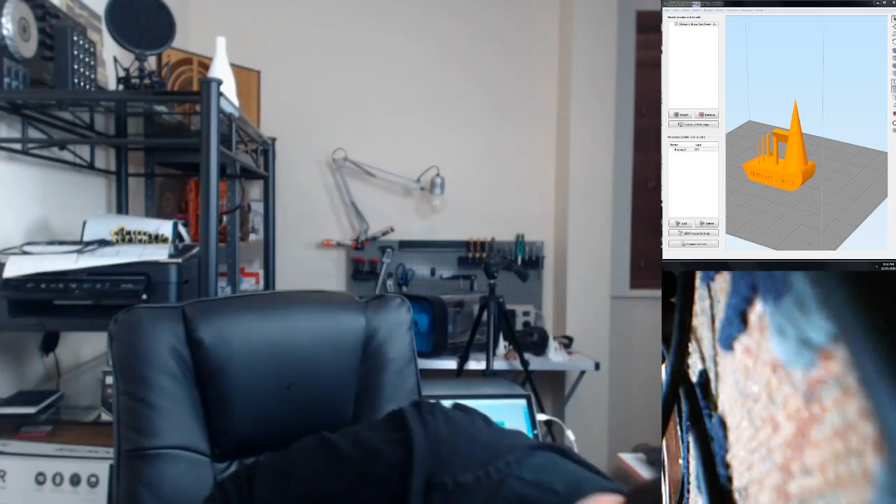Awesome to see you, Richard. To catch a live stream, this is the point of doing it so late. Oh, I lost my other camera again, I keep catching the cord for it.

I wanted to do a late one here in Australia so you could catch it there in UK. So I've got the Trinus printing. It might get too loud with the Cocoon Create on, but we'll see - if it does get too loud, I'll have to print with just one.

Mike is asking, Angus, do you use a 3D mouse when modeling? No, I use this, which is the Logitech G502, which has the highest optical DPI of any mouse. It's an amazing mouse for gaming, and it is an awesome mouse for 3D modeling as well. Although I have tried a 3D mouse, it takes a while to get used to, but I have seen people do good things with them.

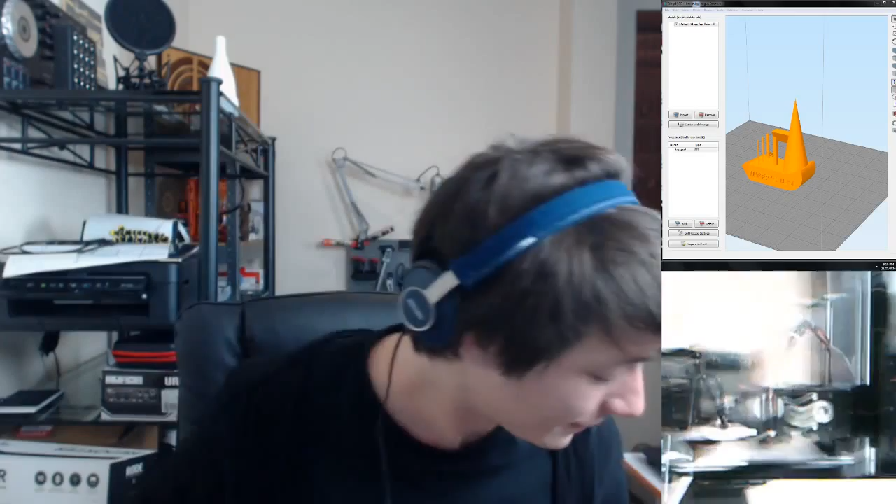So, thinking what filament to print on the Cocoon. I'll probably go with one of the PLAs. Let's see - we could try Polyflex, that might work, it is the Flexion extruder. I'm all open to failures on streams, let's try that.

You have a question? Yes. Okay, what do you think about the Wanhao Duplicator i3 version 2 versus the Malyan M150 i3? That's a good question. So the Malyan M150 is a Hobby King clone of the Wanhao i3. They're both pretty similar, but the Hobby King one's slightly cheaper - it is a clone of a clone, essentially. Yeah, I would just get whichever's cheapest, to be honest, they're both going to be very similar and have the same extruders.

I was going to be getting one of the 150s, I'm not sure if I am still yet. But yeah, whatever you can get, basically - they're going to be very similar printers.

And no, I'm not drinking Red Bull. I am actually having a GT, because it is 9 o'clock at night. I don't drink Red Bulls that late. Only Joel does.

Minion, can you grab me a pair of cutters, please? This one? Yes, thank you. Without pulling the entire tool thing down, thank you.

So I am printing Polyflex. This is Polyflex, very flexible.

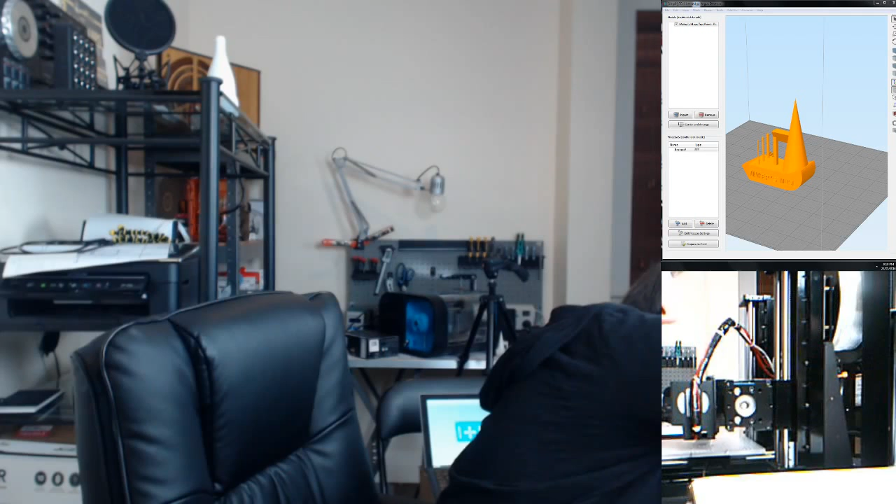So I'm just going to try to feed this in, if it works. Let's see.

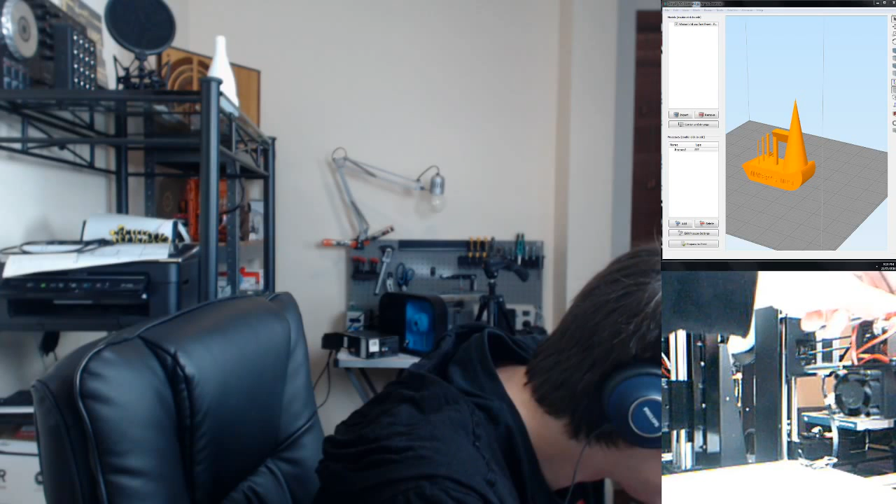You can ask me questions while I'm doing this as well. I can't see the screen.

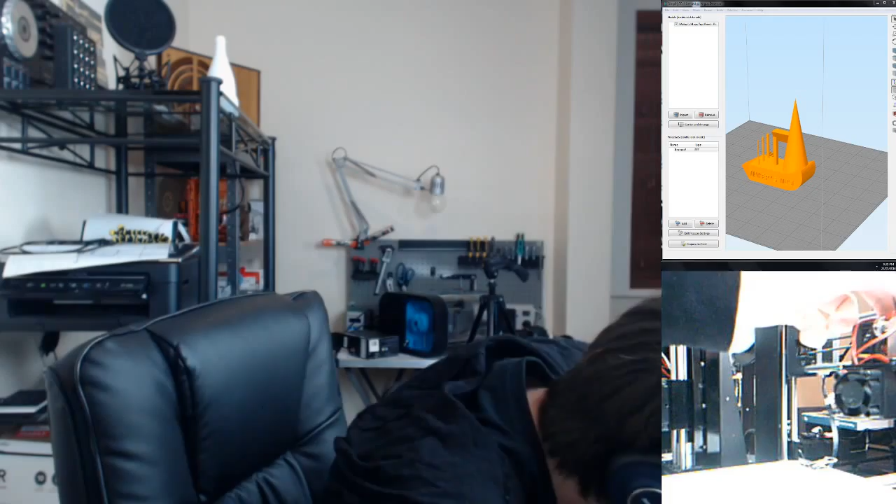Energy Strike would like to know, do you like the Hobby King filament? I haven't actually tried the Hobby King filament myself. I've heard that the colours are not fantastic, but apart from that, yeah, it's cheap. It is really cheap. Hobby King filament is ridiculously cheap. Whether it's good or not, I'm not sure. I haven't tried it yet.

This is the only problem with filament samples - you end up with especially flexible materials. So this will be interesting. I'm going to have to hand feed this.

Right, so let's load up a cube. I'm going to go with Wanhao i3. And I'm going to change it to a 1 multiplier, 0.25. And print speed, I'm going to put that pretty low, just conservatively, so maybe 2000. Yep, it's good.

Question? Yeah, go ahead, you can interrupt me anytime. What do you think about the Anvil 3D on Kickstarter, if you've heard of it? To be honest, I haven't looked too much into it. I've been looking at some other Kickstarters, like that toy 3D printer for kids, and the really cheap 3D printer, but I haven't looked too much at the Anvil. Just double check - Anvil, it's the one I'm thinking of. Yeah, I haven't actually looked into this one at all. To be honest, there's been something like 5 3D printer projects over the last month on Kickstarter, and it's been really hard to catch up. But yeah, it's another low-cost printer. I'll definitely do a video on it before the campaign ends, though.

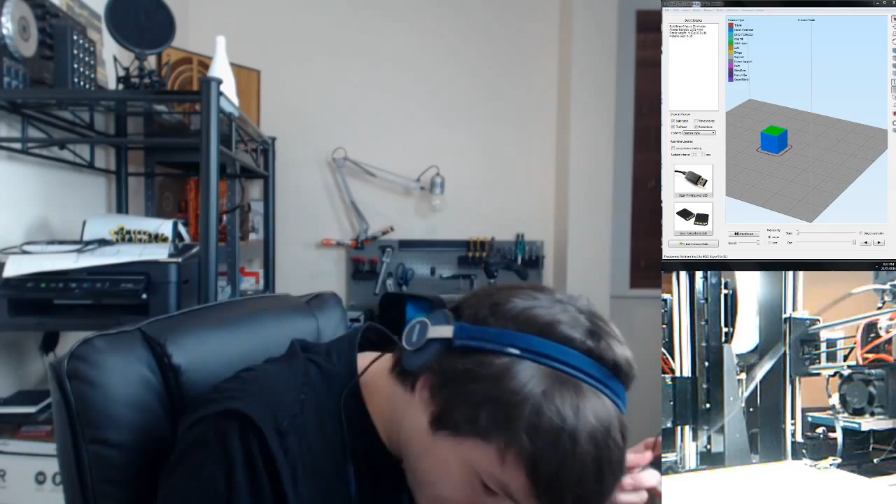How'd you go? I don't think there's a spare one. You can probably unplug... USB in here? Is there a... yeah, unplug the USB.

Energy Strike - any way to get Simplify3D legally if I don't have $150? You could ask them nicely. That's what I did, that's how I got it. But apart from that, not really.

Ben's asking specs of my rig. I've got an older generation Core i7, I can't remember which. It's mini ITX board, 8 gigs of RAM, GTX 760. Most of it's secondhand, and I only recently pieced it together out of bits and pieces. But it's quite good, it does what I need.

Okay, so I'm going to send this to the SD card.

Inkdroid would like to know, if you could print with any 3D printer, which one would it be? If I could print with any 3D printer, it would be one of the humongous Projet systems that 3D Systems sell, like the humongous resin systems, because they just are awesome. I mean, but they cost $500,000. But, you know, you didn't put a price tag on it.

And Evan's asking about the BPS. No, I haven't had any time, Evan, at all to do anything with the BPS extruder yet. I will as soon as I can, but at the moment I need to finish testing the Flexion.

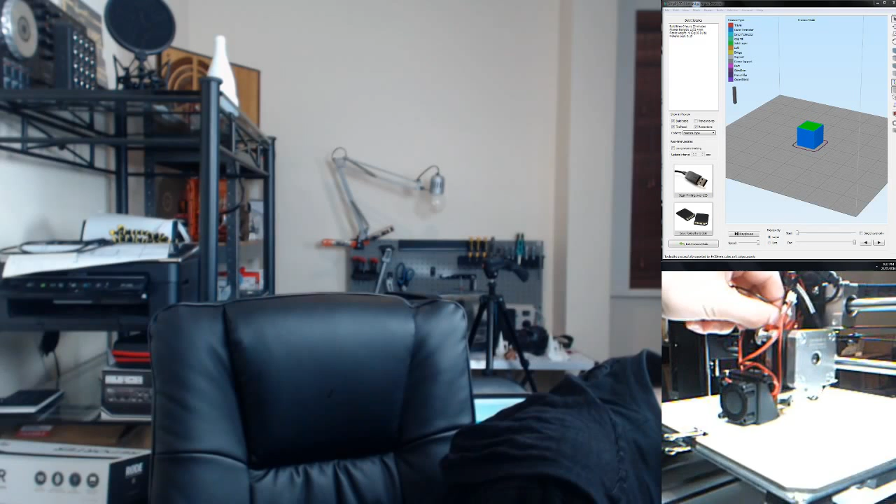Make sure this is actually extruding. Doesn't really look like it's extruding. There it is now, sorry to interrupt.

Carl's asking about the best value filament in Australia. That would be the Hobby King stuff. I like eSun personally, I think eSun is very, very good. But yeah, the Hobby King stuff is also very, very cheap.

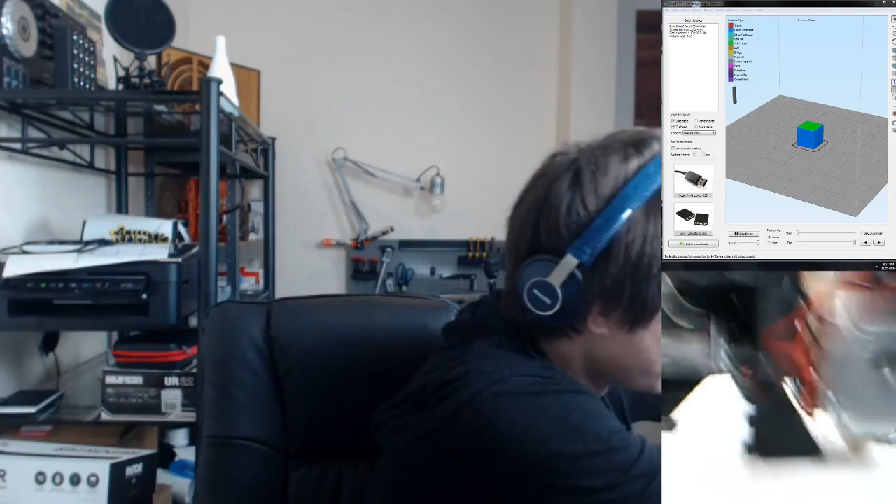Jason is asking about Hatchbox filament. Have I tried Hatchbox? No, because it does not exist in Australia at all, you cannot buy it in Australia. It exists in the States and possibly the UK, but it's a renamed Chinese brand that's been distributed, and I've never seen it here.

Evan's saying about the new PLA Plus, which is a higher temperature PLA, so I might have some of that in my box of tricks. Let's have a look, this place is a complete tip at the moment. I keep tripping over wires and all sorts of horribleness.

That's the carbon fiber, which we won't be printing today because I don't have a hardened nozzle. What's this?

Question: Michael would like to know, any word from Tevo about the Tarantula? Oh, hey Michael, good to see you in here. Yeah, I had a really nice chat with them on Skype. So in terms of me getting a Tevo to test, they are sending me one to test out. And yeah, that's really cool because it'll be the first low-cost kit I've covered on Maker's Muse, and they seem really comfortable and confident with their products.

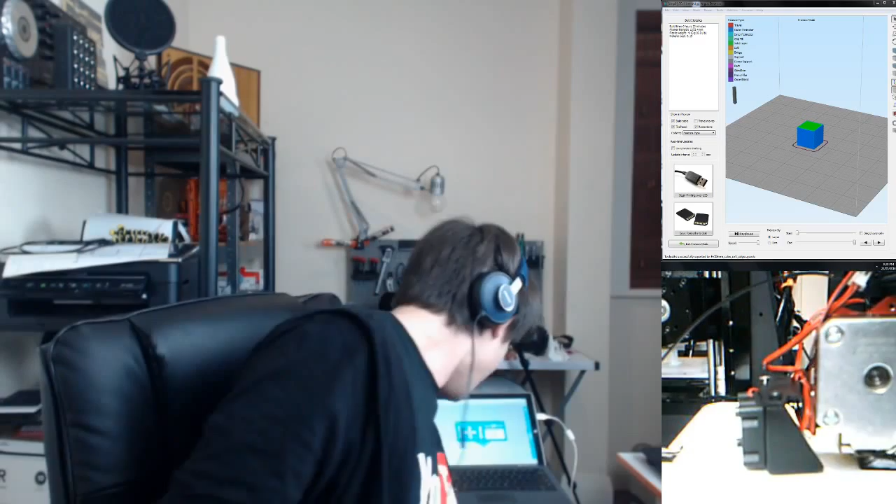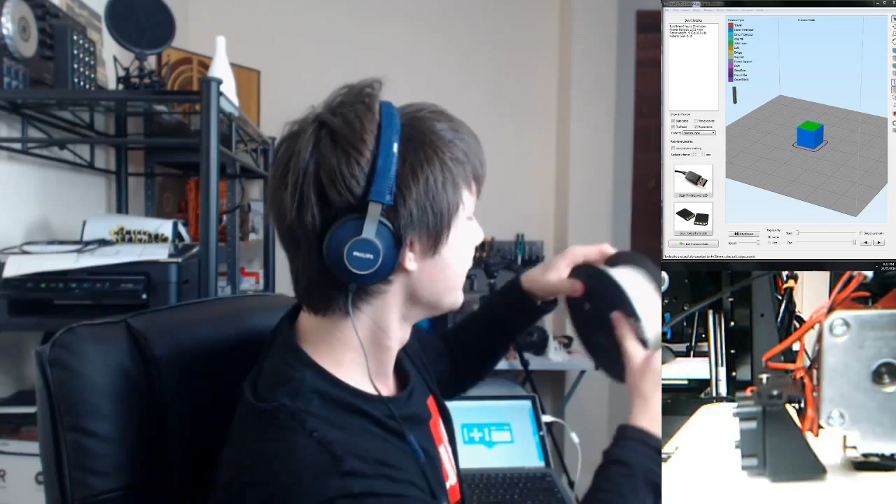And the Trinus is finished. How about that? Let me get that off the bed. I don't know if you can see that in the cam—this is the print off the Trinus. It did have a bit of filament at the bottom, so it's a bit crap there, but this is a pearlescent filament I'm testing at the moment. If you look at the roll, it's sort of a pearlescent effect. It's a really nice PLA filament I'm testing for a friend in China.

Thoughts on the Carbon 3D? Let me just grab another roll of filament. So the Carbon 3D has come to market now.

But there's still a few doubts in my mind about it. They always show it printing lattice structures with a thin cross-sectional area in terms of the print bed as it grows. I would love to see them print something like a brick—I know it's stupid, but I'd love to see them print a brick of resin out of that technology to prove it can print something that large without warping. Personally, I think it can't. I think you'd get dimensional inaccuracies printing something so large, which is why they print lattice structures to prove their technology.

I'm just going to dump these all out, I'll clean them up later, tidy it up later. So we've got some more Polyflex. This is PVA, which I'm not going to print with because that's just useless.

What are your thoughts on 3D printing drones? So, yeah, I mean, why not? People have been 3D printing quadcopter parts for ages, and there's no reason you can't do it. So I definitely think, yeah, go ahead, it's a great way to do it. You can prototype on the fly, test it, and if it breaks, print another one. Nothing wrong with that. They're all the fancy ones.

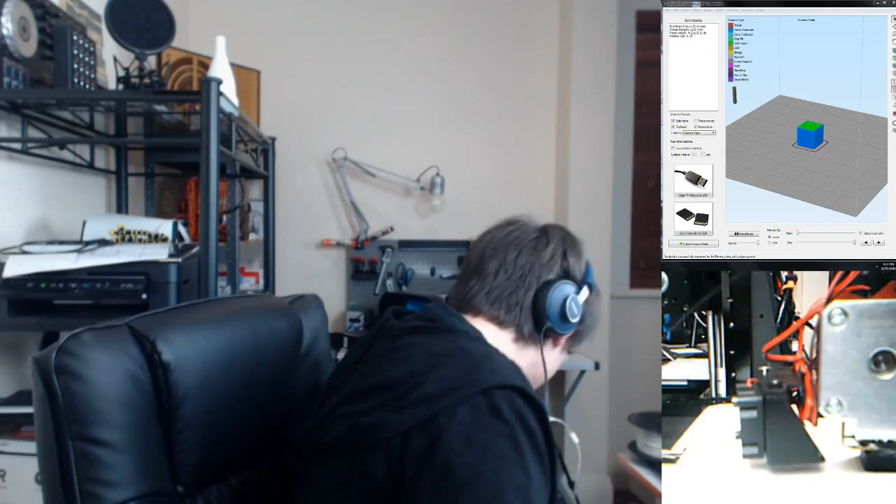And I found the red. It was hidden. There we go. Evan, you're so clued on.

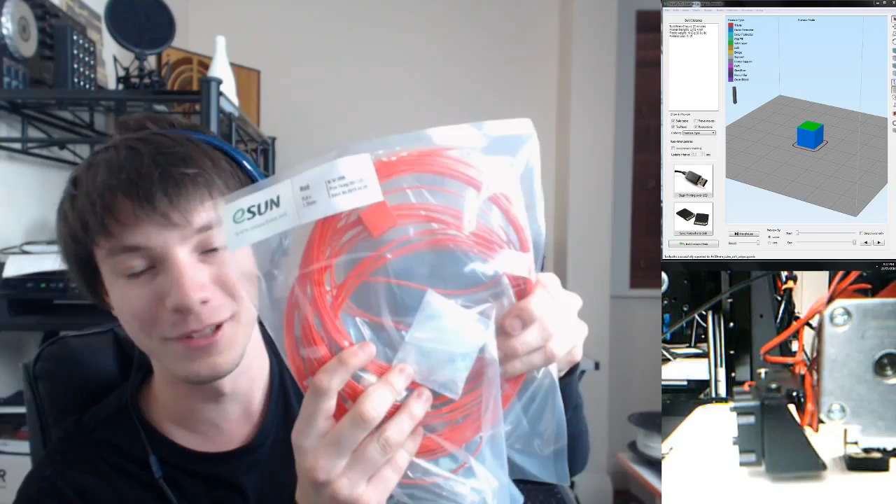Okay, so this is the PLA Plus from eSun, which is a higher strength PLA. Let's try printing that.

A question - should I buy a Wanhao i3 from Amazon for my first 3D printer? Yeah, okay, so the question is, should you buy a Wanhao i3 from Amazon for your first 3D printer? I think the Wanhao i3 is a respectable first 3D printer that you could buy.

It's not the best machine on the market, but it's definitely fairly easy to get up and running, keep running, maintain, calibrate. Just gotta keep this feeding. And it's cheap - really cheap for the bed volume you get.

I've done a review on the original Wanhao, which was okay. I had a few issues. The Cocoon Create is the same as the Wanhao V2, and the version 2.1 fixes the issues I had with the V2. So yeah, it's a machine I would highly recommend for newcomers with a budget for 3D printing.

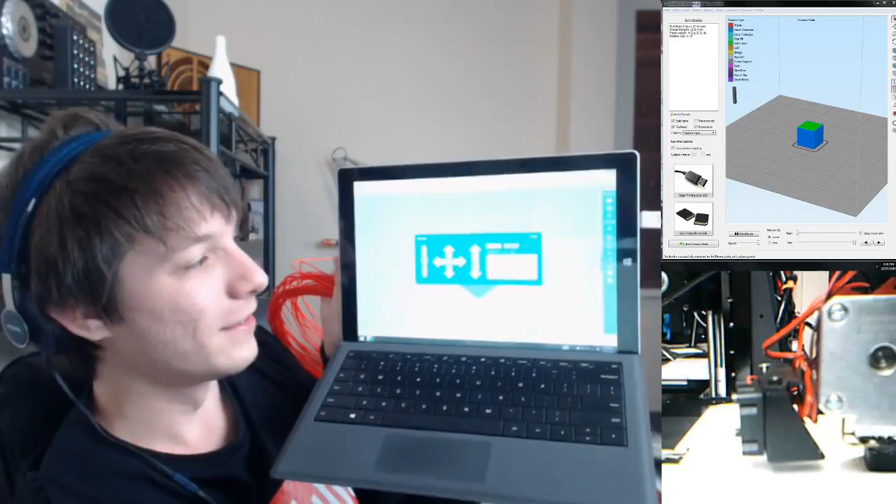Definitely. Right, let's see if I can heat up. I'm using Pango software to run the Trinus. It's not very good, but it works. But it's a Kickstarter project, so it's got a long way to go.

How's your anime print going? Oh okay, while this is warming up, the question was, how's the anime print going?

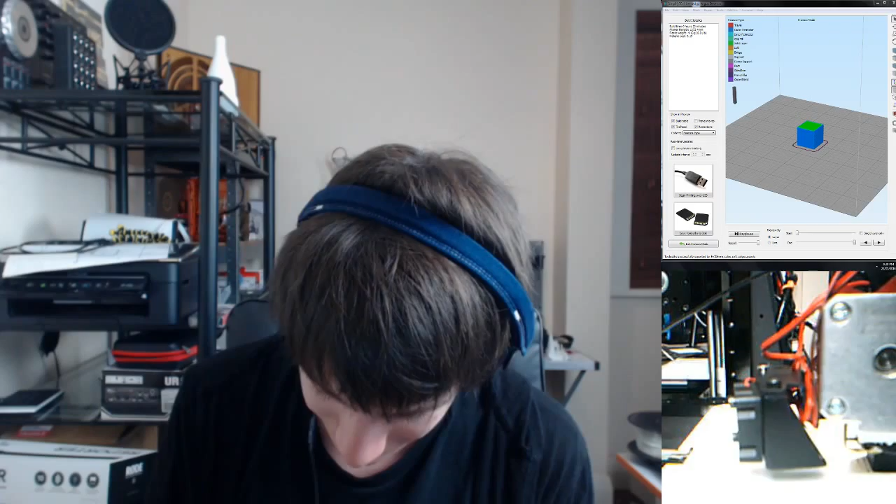So because you guys are in the stream, I will give you a sneak peek. Okay, ready for this? This is how it is so far. There you go.

What I've got - the head that's separated off into one piece with the hair. I've got the arms which clip into the skirt, or top, I don't know. It's too thin, so I need to go back into Meshmixer and thicken it up there because it broke through. That's the bottom of the skirt. And that's the top of the legs.

And this is the classic Miku little arm - I call them arm stockings in my file, I don't know if that's the right word for them. But look at that hand. That hand detail is phenomenal.

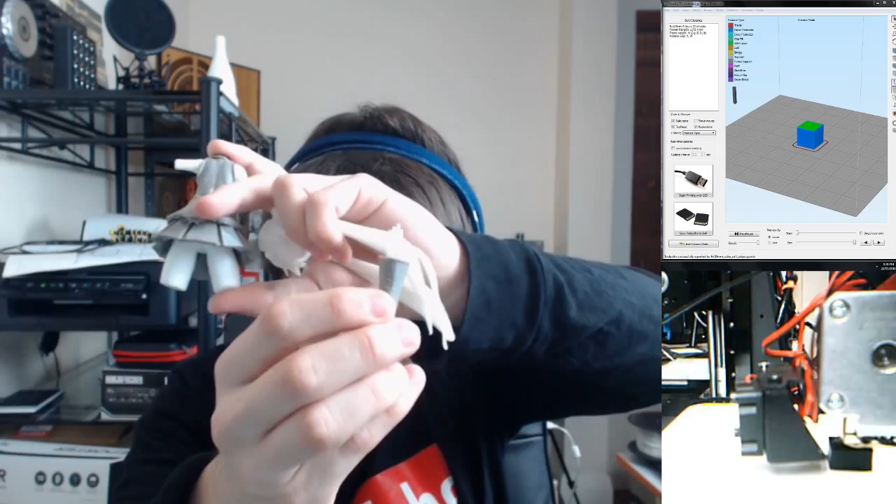If I can... there you go. That hand looks so good. And the legs as well, the feet. So I've been printing this in just white and grey PLA.

The grey PLA is actually something special - it's a formulation I got done for myself to test out, and it's actually working really well. So a little bit more on that later. But yeah, it's coming along.

And then once I'm happy with it, I will use my Miku Blue PLA to create an assembly. And I'm probably going to do it twice the size of that. So big, it's going to be cool, but it's so hard to do. I was going to make a tutorial out of it, but it's so difficult.

In terms of what printer I used, the Upbox at 100 micron layer heights in PLA. And the Upbox is a fantastic printer to do that sort of detail.

Alright, I'm going to change the filament over on the Trinus. So again, that's that pearlescent filament I'm testing out for a buddy. Put that aside. And see if I can find the end of this sample.

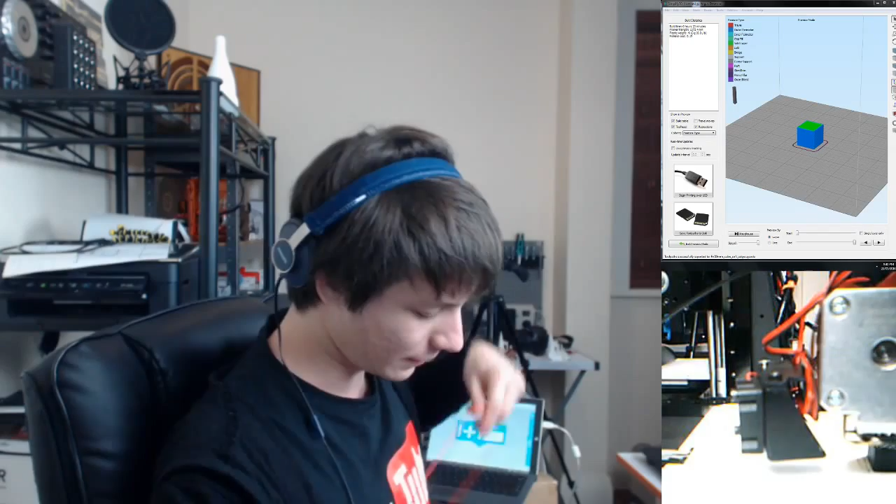Question - what are your thoughts on the Robo 3D R1? That's a good question. So the question is, what are my thoughts on the Robo R1? I have never used one.

I have heard that out of the box they're not very good. And I was going to have one on the way, but it never materialized. So I might follow that up, but to be honest, I've got enough things on my plate that I don't have time to review machines like that at the moment.

But yeah, I know some people with them that really like them, but I definitely know a lot of other people that have issues with them. Out of the box, they're not very good from what I understand.

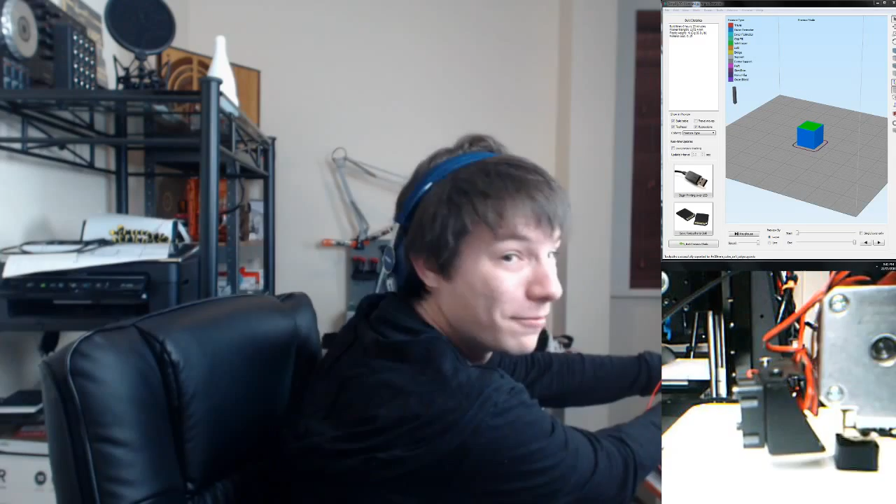Go with a Wanhao. Just get a Wanhao. Everyone has a Wanhao - there's got to be thousands of them around the world now. It's such a popular printer now.

Right, so this is the PLA Plus from eSun. So let's do another print.

There's just crap everywhere, it's absolutely everywhere. Oh dear.

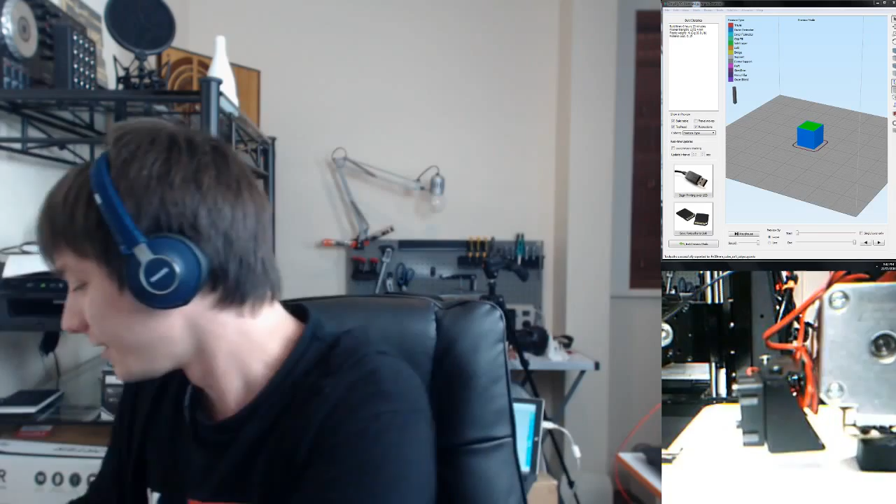So Boomerang Freak, in terms of that pearlescent filament, basically it's a PLA that I'm testing for someone in China. I can't go into any more detail about it yet, but he's going to be releasing it soon, and I'm just helping him quality control test it. I am super impressed with it so far. Where is it? This is a print I did with the orange variant of it.

Actually, this is a really... I'm going to talk about this in a video soon. This is a really cool print. But yeah, the orange is just nuts. And this is the grey I've been testing, and it's phenomenal PLA. Really, really strong as well. It's a modified PLA, it's not just pure.

I've got a thing from Mike. He said, I bought some nylon, it's a great material, but I cannot get it to laminate. Have you printed with nylon before? Yeah, okay, so the question is about printing with nylon.

Nylon is super difficult to print. If you thought ABS was hard to print with, nylon is something else. To print successfully with nylon, you need a really hot bed. You need a nozzle temperature of about 260 degrees, I'd say, depending on the brand. And you need to make sure the nylon is completely dry, because if it absorbs water, it will start bubbling and it'll ruin your print.

In terms of a build surface for sticking nylon down, I have found, for me, if you get BuildTak and sand it - nylon wants a rough surface to stick into because it's really slippery. It doesn't stick well to smooth surfaces unless you're lucky and get a lot of suction. It wants to dig into little grooves. So I've actually sanded BuildTak before and stuck it down to that. People have sanded Garolite, which is like a fiberglass plate.

That works as well. But in terms of support material and rafts, you can't get any support material off - it just welds, which is why it's so strong. But yeah, try sanded BuildTak. I know it sounds silly, but it's worked for me in the past. But it is hard to print, definitely difficult.

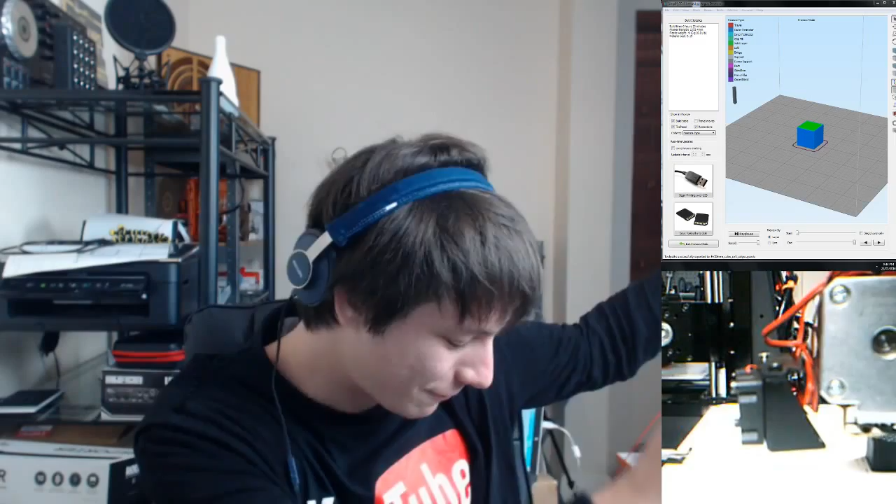One from Ben - he tried craftware during the week, but it keeps slicing with gaps in layers. Do you know what the fix or issues might be? Craftware, craftware, so the question was about craftware having gaps in layers? Yep, gaps in layers, keeps slicing with gaps in the layers. Weird.

I had that issue recently with another file, and I thought the file was corrupt, but maybe it's an issue with the latest craftware - I'll have to look into that a little bit more. Try sticking it into Cura and see if it does the same. If the same file does not have issues in Cura, then it's craftware that's causing the problems. I haven't really used the newest craftware, so I can't help you, unfortunately, for that.

And Mike's saying, done all that, what about speed? So about the nylon, you can print slower, but again, as long as your nozzle is capable of keeping a high temperature of 260 degrees, then it's fine. You will get stringing though - nylon will very much string between things. You just cut them off with a knife.

So Ben's saying there's layers missing. Try Cura to see if your file still has problems, but I did have something, funnily enough, similar yesterday in Craftware with one type of file, and I'm not sure what was causing it, so I'll need to look into that a little bit more. The 3D printer is suggesting to fix your model, make sure it is not damaged, because that will definitely cause problems. So remove one of the issues if you can.

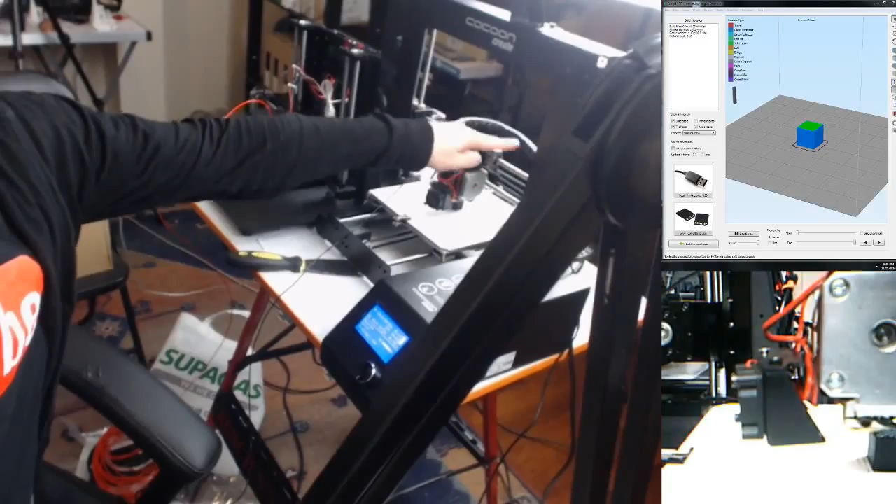I am not the person to ask for that. But if you look at the Cocoon Create, it has a cable guide. That's a fantastic way to manage your cables without fatigue. Or a cheaper way to do it on the Trinus is one of those wire cable organizers you buy from a stationery store. That works pretty well too. You don't want anything where the wire bends 90 degrees because that causes fatigue and breaking over time. But yeah, I'm definitely not the person to ask about it. I just zip tie stuff randomly and hope for the best half the time.

Daniel would like to know where I studied industrial design. I studied that at UTS, University of Technology Sydney.

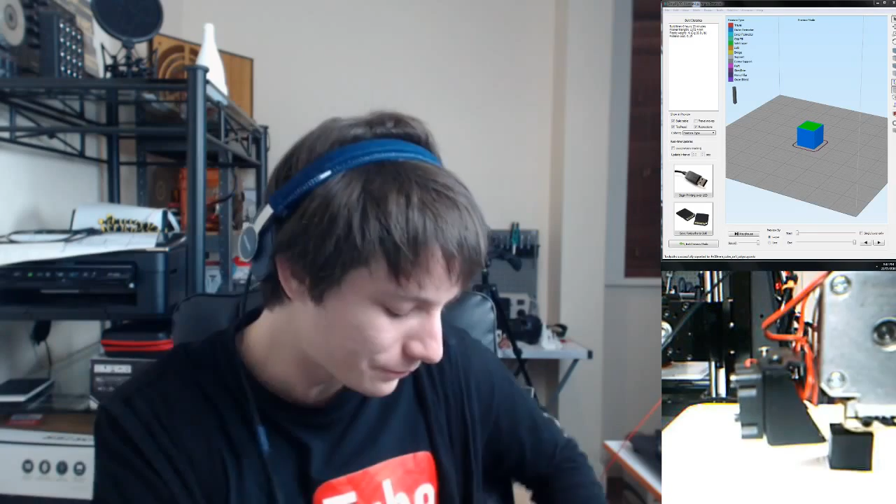Out of high school I wasn't sure what I wanted to do. I was building combat robots at the time and not paying attention to my studies. My parents tried to make me enroll into engineering because they thought that would be great, and I thought robots equals engineering. I did get in, but decided to do a gap year working as an apprentice in electronics. I don't know why, but I learned a lot. Afterwards I decided engineering wasn't for me because I hated maths. I got into my industrial design degree because I could tell them what type of steels I was using in my combat robot, and I could use Rhino for 3D modeling.

That was a four-year degree, very intensive, four years full-time. The final year was all about major projects and presentation, which is why I know a fair bit about machine design, because I designed my own 3D printer at the end of my university degree. That's what I did. Excuse me for a moment because the Polyflex is tangled around my chair.

Oh dear, run over it.

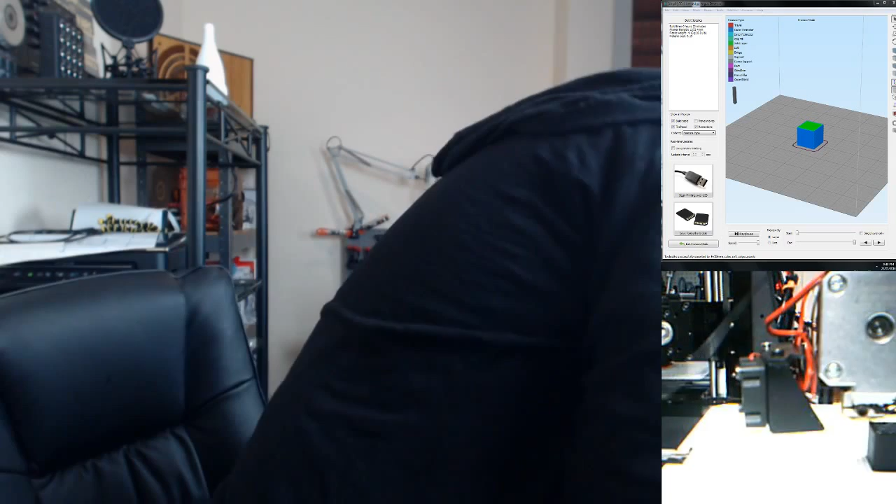While you're untangling - someone asked, what's your favourite wood filament, or the best one? They're all pretty horrible, honestly. The issue with wood filaments is they have wood particles in them, so you risk blocking your nozzle. It doesn't matter what brand it is, it just takes one or two particles that are a little bit larger than the rest to block your nozzle.

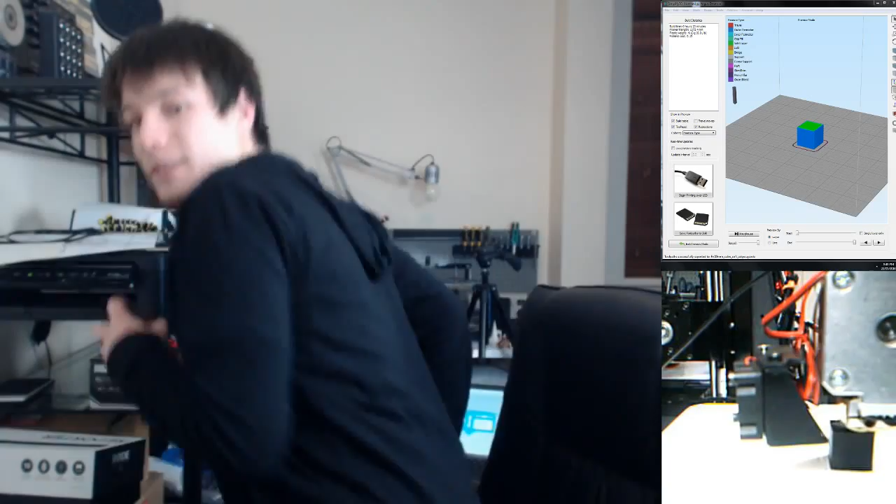And also they're very soft. I've had great success with the Filamentive wood PLA by printing very fast, and I like that it's a darker colour. I'll just show you quickly - I have reviewed it. This is the Filamentive wood PLA, a nice dark wood colour, and it's my favourite at the moment. Prints pretty well, but you have to print quite fast. I tried the original ColorFabb wood fill ages ago and it just clogged every printer I used. I think it's changed now, but it put me off.

Mike would like to know when I'm going to start printing with concrete and ceramics. There's a whole class of paste 3D printers, like ice cream or cake icing - that was my design, I designed a cake icing 3D printer back in university. Then there's concrete and ceramics. They're cool, but not really something I'd do. I don't see them being fully practical yet, they're more of an art project.

There are ceramic printers that use a powder and print binder into the powder, then you put that into a kiln. They're pretty cool, you can do some really accurate things, and I think that's how Shapeways does it. But in terms of me doing it, I think I've got my hands full at the moment with all this other type of 3D printing, let alone other technologies. I am looking to get a resin printer very soon though, and I may make one first - some of you will know about the YOLO project.

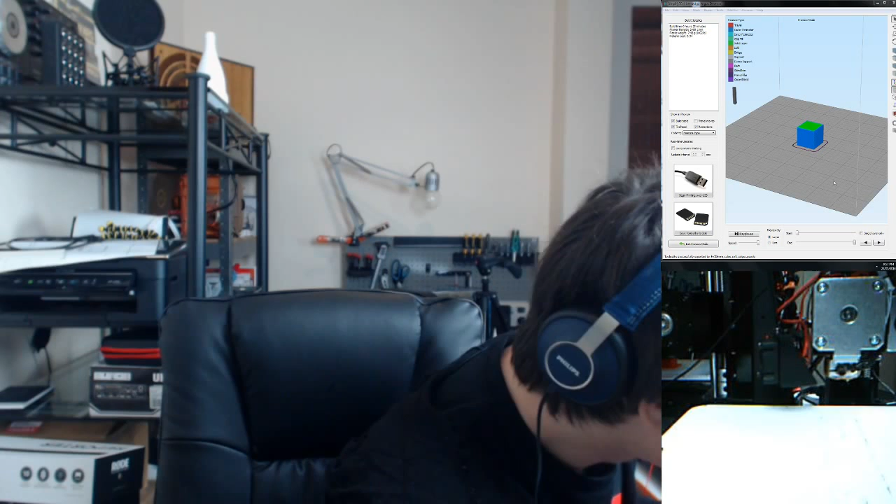Someone asked how do I get my minion to answer questions? She's just choosing one she likes, I can't control these minions. Cool, that's a tangle.

Fran's saying you ordered your Wanhao i3. Good choice. I mean, I wish Wanhao paid me to recommend them, but I've never actually talked to Wanhao personally. It's funny.

This is never going to untangle at all. Let's hope it's enough for one cube.

Is the Original Prusa i3 any good? The Original Prusa? Is it like the genuine Prusa, the new Prusa? Because that looked really, really good. I haven't looked into it too much, to be completely honest. If it's a different brand, I don't know about it. But yeah, if it's the genuine Prusa, you know it's going to be good. I mean, enough said, it's a genuine Prusa. I haven't ever used one just because once you get them to Australia, the price to performance doesn't quite line up. But he's the guy that invented the whole i3 design, so yeah, it's pretty good.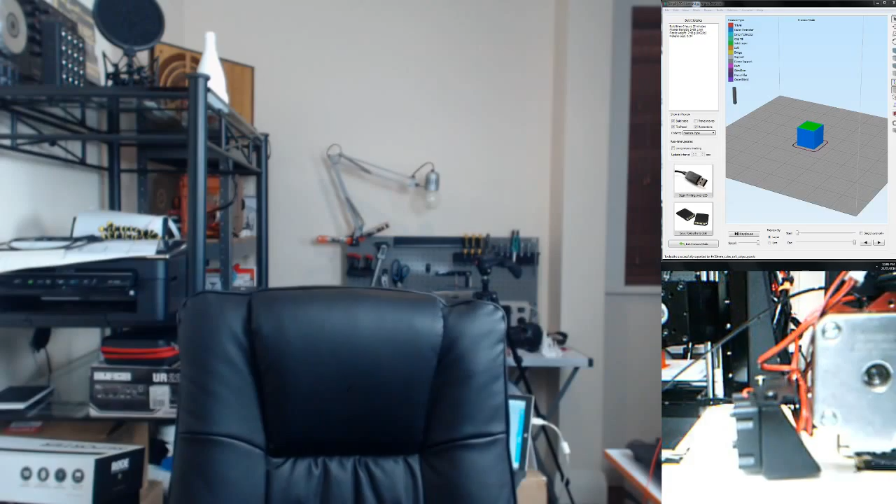Have you tested any dissolvable filaments? Again, that goes back to the dual material question. So I do have a PVA from eSun - that's wood, oh I can print this one after. No, I have a PVA somewhere that dissolves in water, but because it dissolves in water, it's susceptible to absorbing moisture, difficult to print with, and I've never really seen it work very well. It's one of those things where it's so hard to fine tune, and then you can only use it with PLA. Difficult. And it's good to see Sparky in the house.

How's that WA storm going for you? Apparently it knocked out my girlfriend's internet.

What's your favourite printer and filament? Big question. What's my favourite printer and filament? Yeah, again, I'm loving the prints off the UP Box for reliability. At the moment, it's the machine I go to the most for detailed prints because it just does its thing. And favorite filaments?

I think it's no lie that the pink eSun's pretty much my favorite. If you've been watching my videos, I do anything I can to sneak it into prints. I need to get more, but I don't know where to get it because Hobby King doesn't have it anymore. So I'm probably going to end up ordering a ton of it in, because that's just something I do. Yeah, eSun's pretty good. I like eSun.

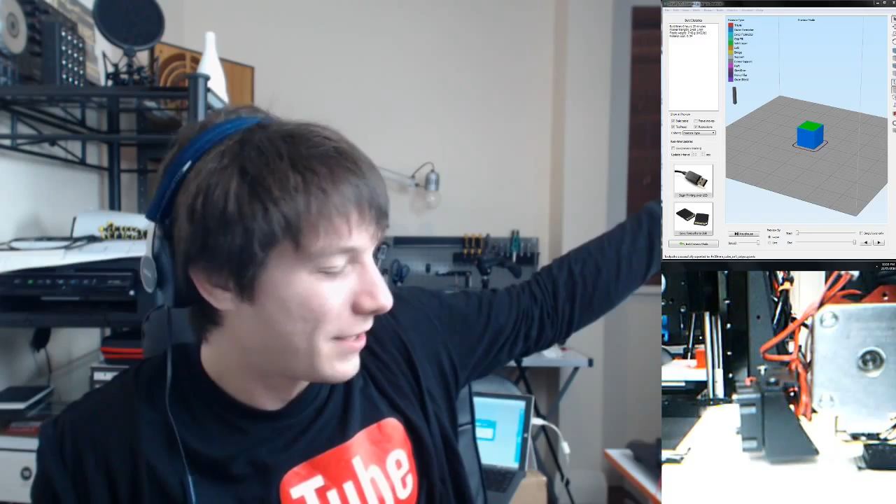I'm getting clicks now and then from the Flexion. I don't know why, maybe I made the flow rate a little bit too high. And the Trinus is done. Again.

So you might be wondering why I'm printing all of these cubes. Well, quite simply, I have tons of filaments, so many different types. The idea is I'm making a filament vault, where I'm going to have a big box with all these different filament samples, and I'm going to record the print settings I used, what they were, where I got them from, and when I bought them. Because filament companies are evolving - they go out of business, they come into business, they change formulas, and I want to document that. I'm a bit of a stickler for documenting this sort of stuff because no one else is. It'd be really interesting to come back to it and say, oh yeah, I want that certain color I tried once, and go into the box and find the cube and say, okay that's that brand, I'll go buy it. So that's what I'm working on, and I'm going to make it accessible to you somehow. I'm still thinking of how to do it, but that's the plan.

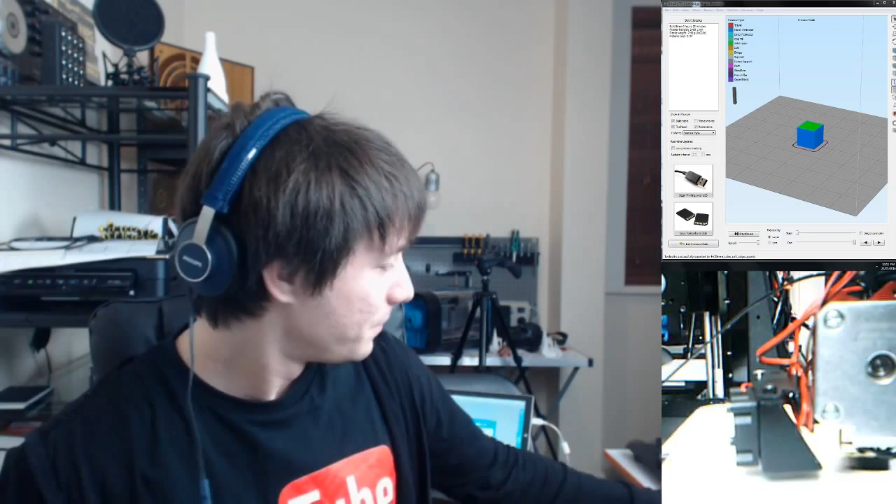CTC 3D printers - you get what you pay for. The question is about CTC printers, they are clones of clones. They do work, but you have to do a lot of finicky work with them, and I think there's no support on them. But that's just what I've heard, I haven't used them.

The Big Box? Big Box is a cool printer from E3D. I haven't used one myself, but E3D make awesome machines, so I wouldn't be surprised if it's a really good machine.

And finally, Delta printers - I can't speak for Delta printers at all. I've never owned one, but I have worked on one before. It was an Australian-made one called the Redback that's no longer sold. It wasn't very good, but the company has improved them since, so who knows? Soon I might be testing one, but I can only really speak for Cartesian machines because that's all I've used.

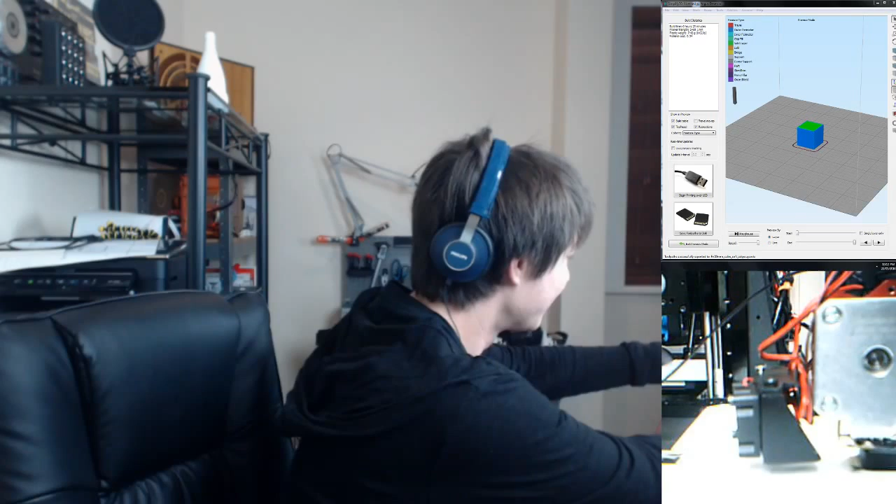Okay, thoughts on BuildTak versus Turnigy blue tape, painter's tape? Turnigy, fantastic - I like how I could guess that one. Okay, question is build tack versus blue tape.

Look, there's no contest. BuildTak is better than all of those tape solutions in my opinion. It's a more durable surface, handles higher temperatures, and stuff just seems to stick to it better. That's not saying blue tape doesn't work, but I find with blue tape, stuff sticks to it too well and you damage it when you take the print off. So, build tack - spend the extra money, get build tack. Or if you're cheap, get the Wanhao build tack, which is cheaper but not as good. Well, it is as good, but the adhesive isn't as good.

Alright, just gonna go down there. And we'll go with one more Polymax. Let's go with a blue Polymax.

Okay, question from Daniel: have you tested an all-in-one 3D printer, CNC, and laser engraver? No, I haven't. The Trinus has a laser engraving head, which I didn't get because it was a pre-production model, didn't exist yet.

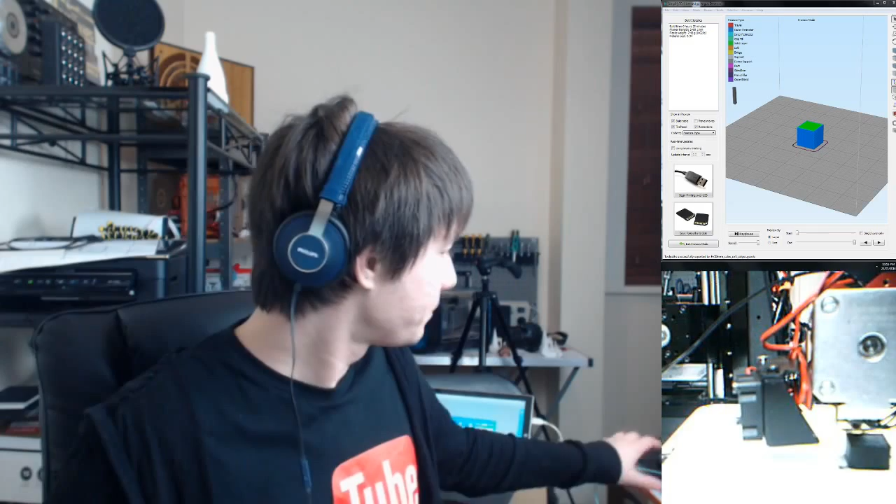Here's one from Bryce - he says he's building a 3D printer and he wants it to be quiet but fast. Should he use belts, lead screws, or ball screws? So the question is from Bryce, asking what he should use to build his 3D printer - belts, lead screws, or ball screws? I guess it depends how deep your pockets are.

The best solution, no brainer, would be ball screws. I mean you get speed - use the 10mm per turn ones, so they move 10 millimeters per revolution. You get speed, accuracy, and they're pretty quiet. They're also really expensive compared to belts - like a league of their own more expensive.

So if you want to make something that's amazing, then use those. But if you just want to make something that's okay and pretty good, use belts because they're so much cheaper. But definitely check out linear rails instead of using smooth rods. Linear rails seem to be like the Hiwin ones I checked out - they're pretty cheap and they are so much better than linear rods. They're just easier to use, easier to mount, easier to get lined up, and that kind of thing.

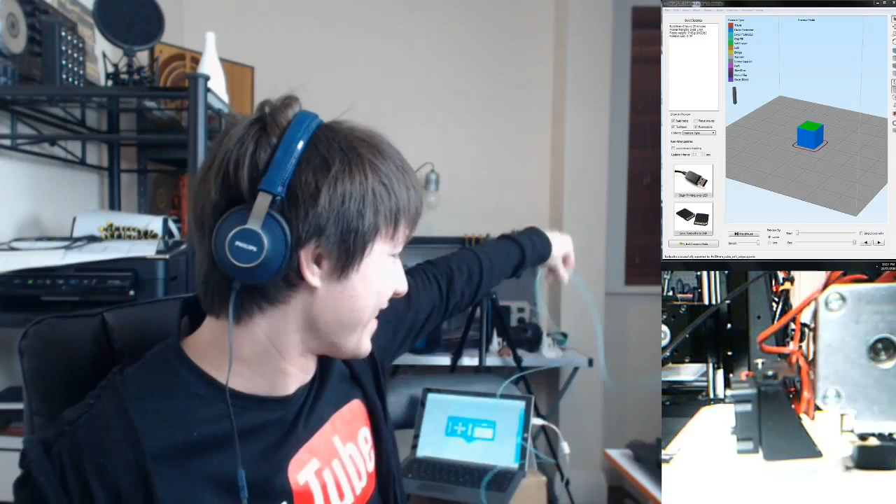Yeah, someone's saying the new FlashForge Finder is really quiet. It is very, very quiet - I was surprised, and I'm not sure how they've done that. They've isolated the motors somehow to isolate that sound.

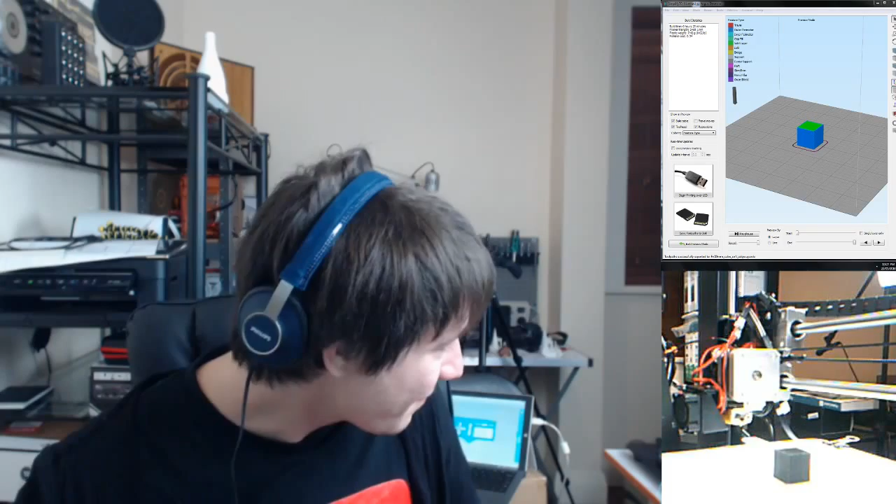Alright, she looks done, so let's see if we can get it off without breaking it.

Alright, so the top infill's still pretty poor. I'll need to fine tune that, but the base didn't break off, which is good. A little bit of stringing - you do get stringing off these flexible filaments usually. But, yeah.

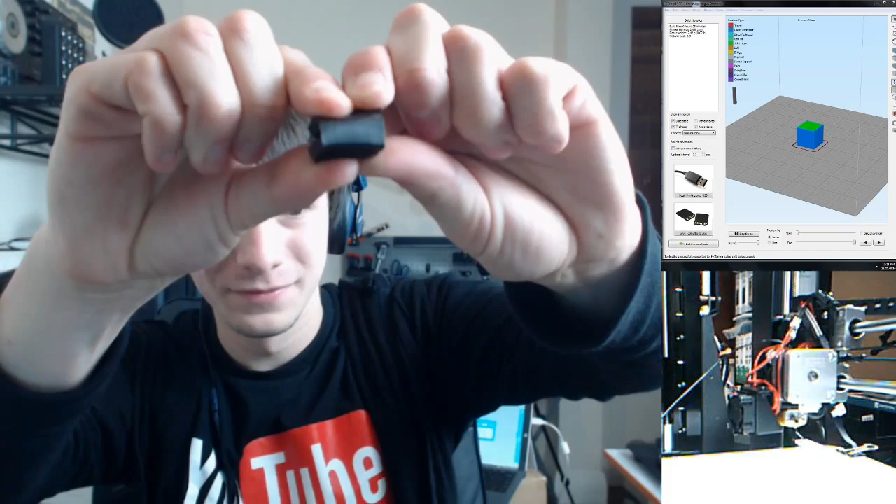Flexible. That's pretty cool. So you can print rubber grommets and shock absorbers and gaskets, I suppose. This is still a PLA temperature filament, so in terms of temperature resistance, I'd say it doesn't really have any, but it's a neat material. So that's the Polyflex Black - I don't even know if it's a PLA, but it's a Polyflex filament. Yeah, not too bad.